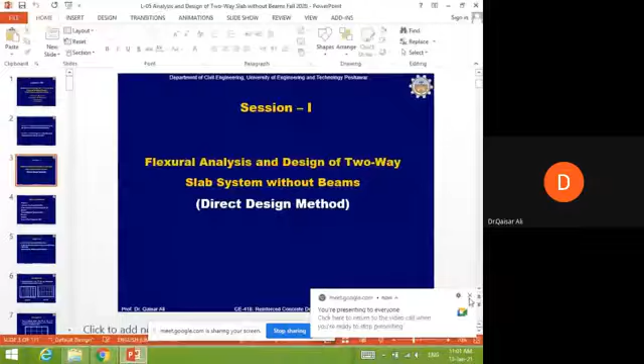Okay, today is our lecture number 5, reinforced concrete design, and we'll be discussing analysis and design of two-way slab systems without beams, which include flat plates and flat slabs.

There are two sessions in this lecture. In session 1, we will discuss flexural analysis and design of two-way slab systems without beams, which is basically based on a method called the direct design method. Session 2 is on the shear design for two-way slab systems without beams.

So in session 1, we will discuss the flexural analysis and design of a two-way slab system without beams.

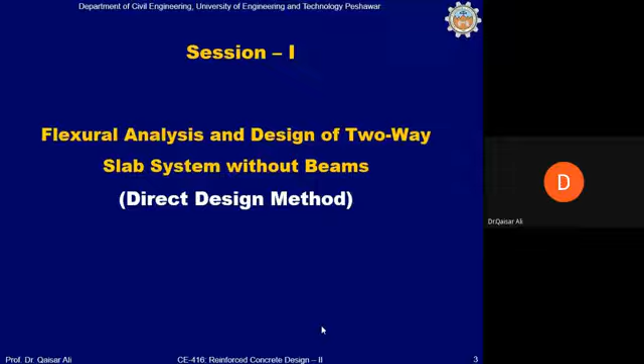The topics to be addressed under this session include background of the method, introduction to direct design method, frame analysis steps using the direct design method, then example 1, two-way slab requirements of the ACI code, examples 2 and 3, and summary of the direct design method.

The objectives of this lecture are: at the end of this lecture, the student will be able to analyze flat slabs and flat plates for flexure using the direct design method, called DDM for short, and analyze and design flat slabs and flat plates for shear.

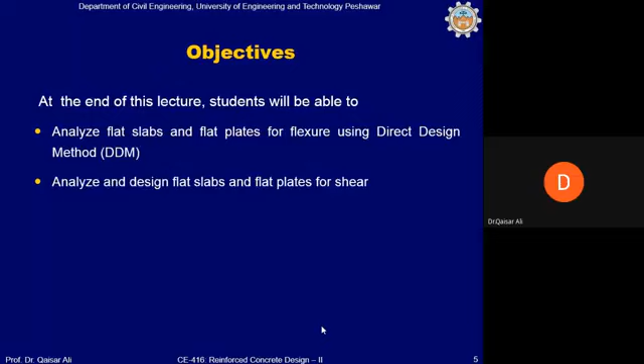This is the background. If you remember, in the previous several lectures before the midterm, we discussed analysis and design of a 90 by 60 feet hall, and we designed this in several ways as a one-way slab system, as shown in options 1 and 2.

We also designed this 90 by 60 feet hall using a two-way slab system by providing columns inside this hall, and this analysis and design was done using the moment coefficient method with the ACI code tables, if you remember.

In this system there were beams, so beams were included, running on the column center lines.

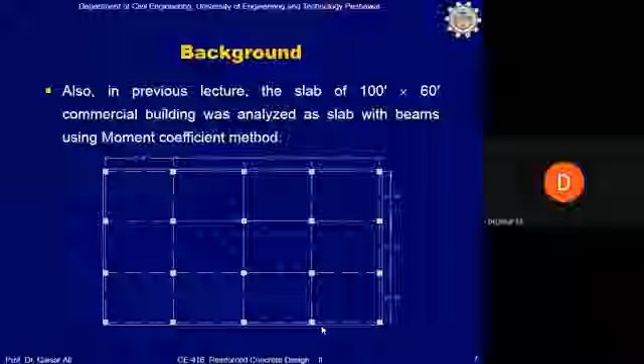If beams are removed from the system, the system can still be analyzed and designed, but then it becomes a slab without beams, which can be provided or not.

So in the same 100 by 60 feet commercial building, if there are shallow or no beams, if the depth is too small, then the moment coefficient method cannot be used.

We have discussed why the moment coefficient method cannot be used, because there is a basic assumption in its application that beams must be stiff enough to resist the deflection of the slab at the points where the beams have been provided.

If beams are not present, or if beams are very shallow, then the beam stiffness will not be such that it succeeds in preventing or resisting the deflection of the slab at those locations. So the moment coefficient method will not be applicable under that condition.

If the moment coefficient method is not applicable—you have seen its application was very simple, and if beams are stiff enough, which is usually the case, then the moment coefficient method can be very conveniently used.

However, if there are no beams in the system, you must have seen slabs without beams, which are not very common in reinforced concrete frame structures, but still quite a good number of systems contain flat slabs and flat plates, depending on the situation.

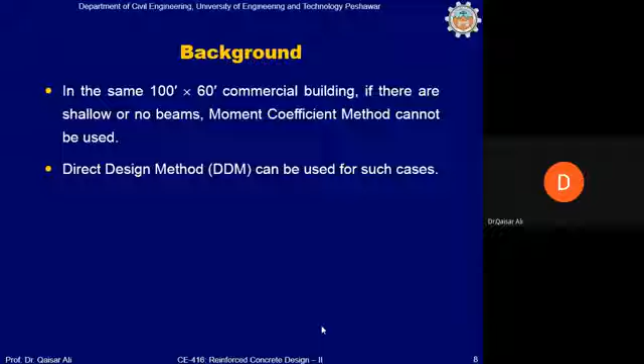So this was about the system. Now, which method shall be used for the analysis and design of slabs without beams?

If you remember, in the previous several lectures you have seen that most of the time we are busy analyzing the system instead of actually designing it. Analysis is one of the most important steps in the overall design process.

If you look at the overall design process, it includes, first of all, an assumption or selection of the sizes of different members, like beams, slabs, and columns. Then the calculation of loads is also very important. Third is the analysis. And fourth is the actual design step, in which we calculate reinforcement, which we call the design step. Though overall, these 4 steps are the steps of design.

So the third step, the step of analysis, is one of the most important steps. You would have seen in the previous several lectures that this is the most crucial step, because it involves analysis, and sometimes it is difficult for us to analyze a system using the exact method of analysis. For this purpose, the ACI code allows us to use approximate methods of analysis, although all these approximate methods are actually an alternate choice instead of the exact method of analysis.

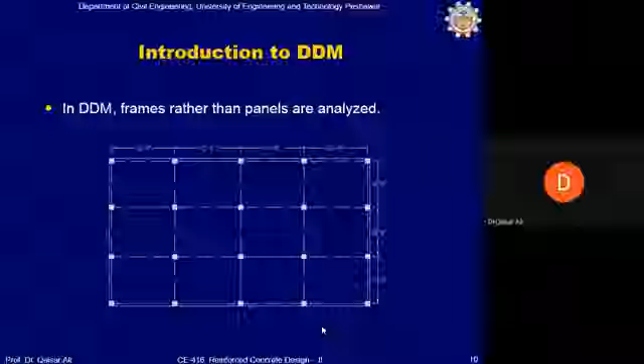Now we will discuss this direct design method by going through its steps. The first difference between DDM and the moment coefficient method is that in the moment coefficient method, panel by panel analysis was done - one panel continuous or not continuous, then we used tables, picked up values, inserted them in the relevant equation, and calculated the bending moments.

In the direct design method, frames are analyzed instead of panels, as you will see in several upcoming animations. For example, if we want to analyze this slab system using direct design method, the center lines are the dotted lines which run on the column center line. They are just center lines, not beams - so the system does not contain any beam.

First, we will divide the system into frames. This frame you can see now on the screen is an interior frame. So the interior frame will be marked, and the frames will be analyzed one by one in both directions in order to get the bending moments in the slabs.

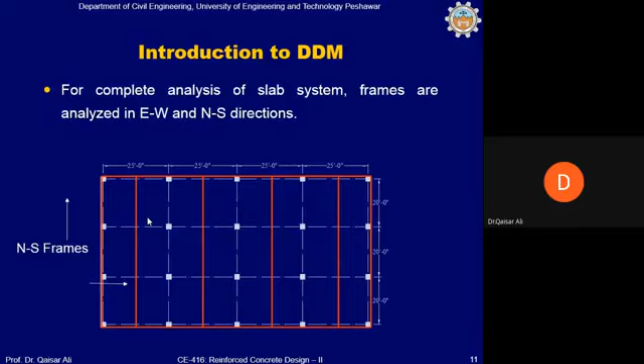Then the frames along the other direction will also be analyzed. After the analysis is completed along both directions, then the design will be done for the relevant bending moments.

Now the limitations of the method. Because direct design method is an approximate method of analysis, every approximate method has its own limitations, and so are the limitations of direct design method. Though DDM is useful for analysis of slabs especially without beams, the method is applicable with some limitations as discussed next.

The first limitation of the method is that the live to dead load ratio shall be less than or equal to 2, which means live load shall not be very high as compared to dead load. Usually dead load is more than live load, so this method is based on the assumption that live load to dead load ratio shall be less than or equal to 2. If it is more than 2, this method will not be applicable.

These limitations have been discussed under section ACI 8.10.2 of the ACI 318. The length of spans shall not vary by more than 33%. This means that if this length is L1, then L2, the length of the adjacent panel, shall be more than or equal to 67% of this at least. If the difference between adjacent spans is more than 33%, then the method will not be applicable.

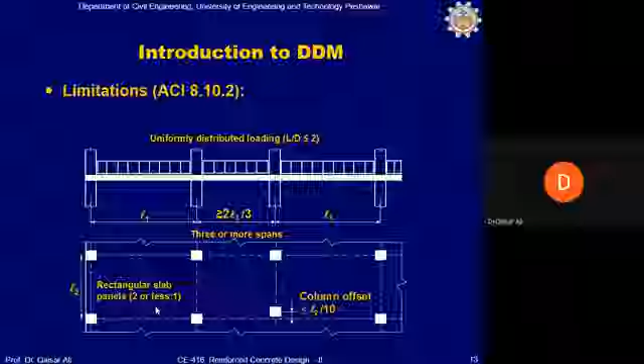The panel must be rectangular or square, and the ratio of long to short side shall not be more than 2. The ratio shall be 2 or less, which will make this behave like a two-way slab, meaning the bending moment along both directions will be there, and both shall be calculated.

The columns must be placed on a common center line. However, if one column offsets from the main center line, the offset shall not be more than 10% of the width of the panel. If this is the width of the panel, then this column, if it is out of the main column center line, shall not be offset by more than 10%.

So these are the limitations. Next, the sizes to be selected in the direct design method are different than the sizes selection which we have used in slabs with beams.

Excuse me, sir. Yes? Please, any question? Sir, should the span be 3 or more in both directions, or just one direction? Both directions.

Which means 3 panels in one direction, 3 panels in the other direction, at least. If there are more, it's okay.

Initially, we can use this table for the selection of slab thickness, because there are no beams in the system, so there will be only thickness of the slab, and the slab must be thick enough. For this reason, the selection of slab thickness is based on this table if the system does not contain any beam. There are basically 2 main columns: this column is without drop panels, and this column is with drop panels.

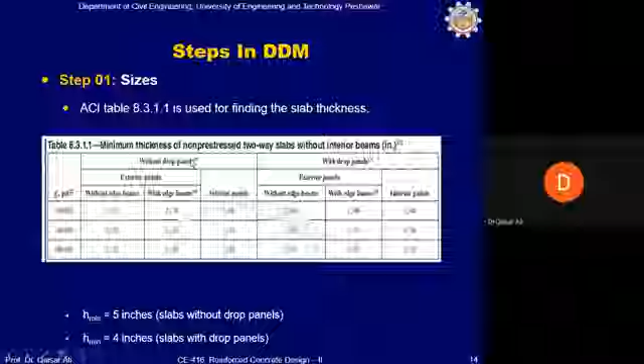You know what a drop panel is, we will discuss this in the next several slides. A drop panel is basically a thick part of the slab in the vicinity of the column, which drops below the main slab. So if it is without drop panels, which means there are no drop panels, it is a flat slab system.

If the panel is exterior or interior, if it is exterior, then whether there are edge beams or not matters—sometimes beams run on the exterior edge of the overall frame, which stiffen the system and reduce drift in high-rise buildings. So if it contains edge beams at the periphery, then this will be the formula for the initial thickness of the slab, or if there are no edge beams, then this will be used. For interior panels, this will be used.

Mostly we use this ln by this first column, regardless of whether there are edge beams or not, because we want to keep our thicknesses slightly on the higher side. Although from an academic point of view, you should always use the correct equation. However, in our design practice, we mostly use this first column for the initial selection of slab thickness.

If you have grade 40 steel, it will be ln by 33. If it is grade 60 steel, it is ln by 30, which means that if the length of the panel is 30 feet, then 30 by 30, you would require a minimum 1 foot, or 12-inch thick slab, and so on—you can use the rest of the table. The minimum thickness, however, for a slab without beams and without drop panel is 5 inches, and slab with drop panel is 4 inches.

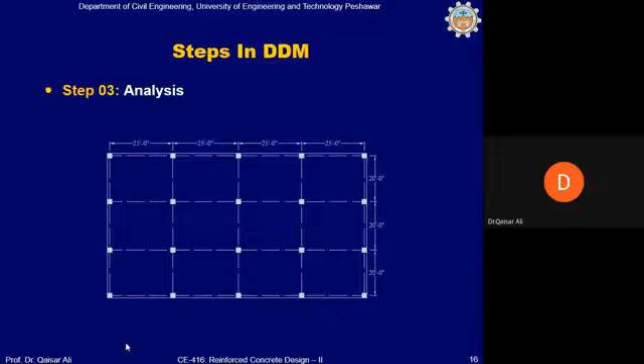The DDM method's first step, step 1A, is marking of the frame and marking of the east-west interior frame. We will do it like this: we will mark the column center line. You can see in the animation the yellow dotted, dashed line.

Then we will draw another line on one side of the column center line, and this line will be drawn or marked on the panel center, so it will be called the panel center line, marked on one side of the column center line. Similarly, another line will also be marked on the other side of the column center line, and this will make the east-west interior frame.

This whole east-west interior frame will be analyzed. This marking of the frames is the first step of this overall analysis method, the DDM method.

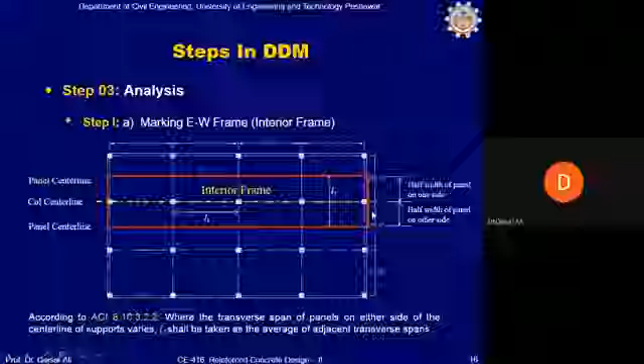However, if there is a difference in the panel sizes, then the average of the two will be taken as L2. For example, if one panel is 20 feet and the other side is 24 feet, from this column center line we mark this line at 10 feet, and from this column center line we mark 12 feet. So 12 feet plus 10 feet gives L2 equal to 22. In other words, add 20 plus 24 and divide by 2, which also gives you 22.

So this means that if slab panels are not the same in size, then the average of the adjacent transverse spans will be taken as L2.

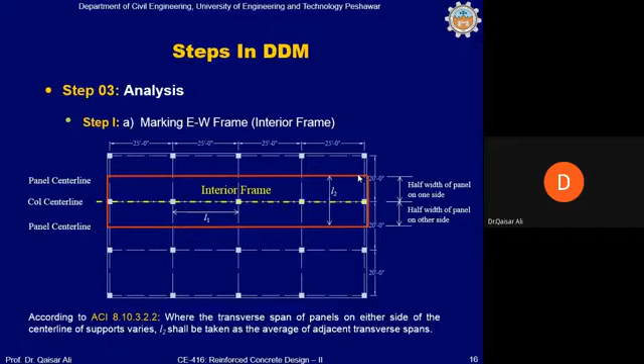Then we will mark the east-west exterior frame. Since in the exterior frame the panel extends only on one side of the column center line, the yellow line, we will consider only one side of this frame. This will be the case of the exterior frame.

However, some small part of the slab also extends to the exterior column edge, which will be shown in the next animation like this. So the total panel is basically the column central line plus half width of the panel, plus the small part of the slab which extends to the column edge.

Okay, any part of the slab which extends beyond this column will not be part of this frame. That will be treated separately as cantilever slab.

So the total width of the frame in this case will be equal to half the panel width on one side of the column central line plus half of the column size, because this is only half of the column. The slab extends only half the column size on the other side.

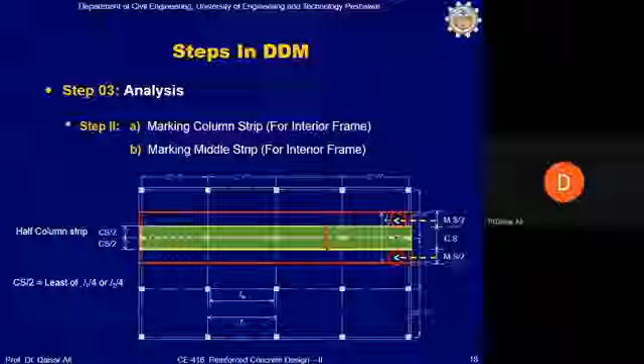Why do we need to divide the frame into column strip and middle strip? The reason is that the column strip would attract more bending moment because it contains columns along this line, so they are much stiffer than the remaining part of the slab. As you will see in the coming slides, once we calculate the overall bending moment, most of the bending moment will be taken by this column strip. So for this reason, column strip and middle strip marking is important.

This is just to calculate the column strip calculations. 5 feet, 5 feet. The total column strip is 10 feet, and 5 feet middle strip, half middle strip on one side and 5 on the other side. This is just a demonstration of the previous step. Nothing new.

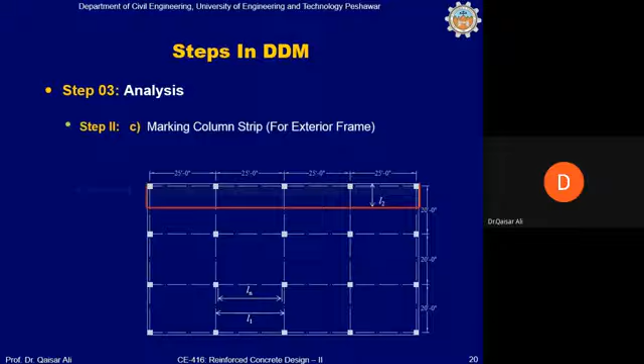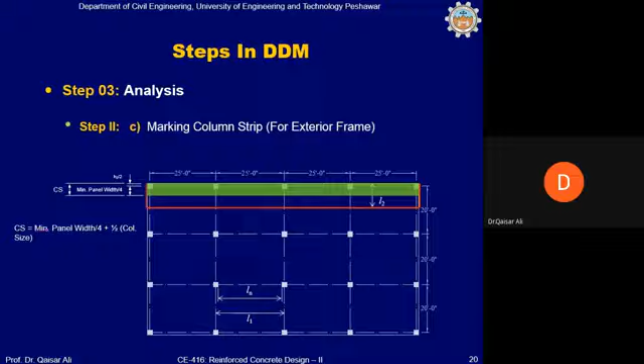Now marking column strip for exterior frame. Column strip for exterior frame is minimum panel width divided by 4, because the column strip only extends on one side of the column center line, so this will be calculated like this. The column strip on the other side will be equal to, from the column center line, half of the column added to this column strip. So column strip on the interior side of the frame will be minimum panel width divided by 4. So 25 feet and 20 feet, out of which 20 is minimum. 20 divided by 4 is 5 feet. Okay, as you will see, like this.

Column strip is 20 divided by 4 plus half of the column size. The column size in this case is 14 by 14 inch, so 14 divided by 2 is used for the column strip in this case.

Total L2 is calculated as half of the panel, 20 divided by 2, which is 10, plus half of the column size on the exterior side of the column center line. So L2 is 10.5 feet: 20 divided by 2 plus half the column size equals 10.5 feet.

Column strip is 20 divided by 4 plus half, which is 5.5 feet, and the remaining is the middle strip. The middle strip will be L2 minus the column strip.

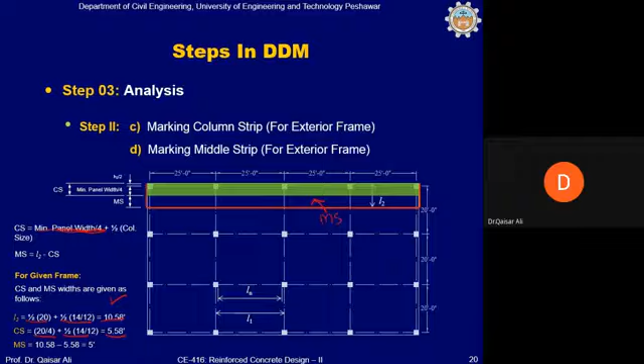Next is to calculate bending moments within the frame. Remember that in every span, the total bending moment, called the statical moment M naught, will always be equal to WU L2 ln squared divided by 8.

For example, if you want to calculate bending moments in this yellow part of the frame, one of the interior spans, then the total bending moment M naught will be equal to WU L2 ln squared divided by 8. This is the total static moment: L2 is the width of the frame, and ln is the clear length of the frame.

WU is the load per square foot of the frame. The bending moments are calculated in a manner similar to the bending moment calculation of a beam. When L2 is multiplied with WU, it calculates the load per running foot, and then ln squared over 8 gives the bending moment across the total width of the span.

For the interior span, once this bending moment is calculated, it is further distributed along the length of the frame into negative and positive bending moments, since we have negative bending moments at the supports and positive bending moments at midspan. The negative bending moment value is 0.65 M naught, and the positive bending moment value is 0.35 M naught.

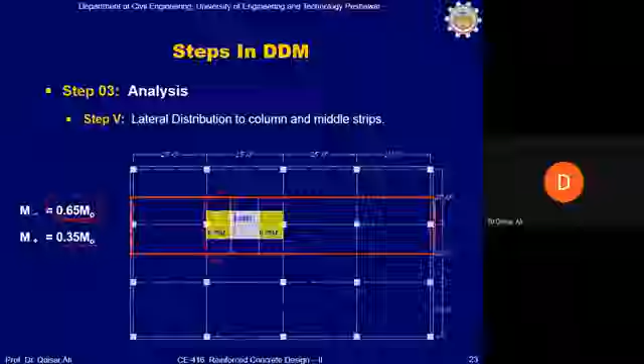Out of this total negative bending moment of 0.65 M naught, 0.75 of it will be taken by the column strip, and the remaining 0.25 will be divided into two parts, half to the middle strip on one side and half to the middle strip on the other side.

For the positive bending moment of 0.35 M naught, 60% of this total will be given to the column strip, and the remaining 40% will be divided between the two middle strips on both sides of the column center line. On the other side, the column bending moment distribution is the same.

Now coming to the exterior span, one of the exterior spans of the frame: the total bending moment remains the same, WU L2 ln squared divided by 8. However, the longitudinal distribution will be different, depending on the end conditions.

If the end conditions are such as shown in this slide, without beams, then the distribution will be such that the exterior negative bending moment will be 0.26 M naught, the interior negative bending moment will be 0.7 M naught instead of 0.65 M naught, and the exterior positive bending moment will be 0.52 M naught instead of 0.35 M naught.

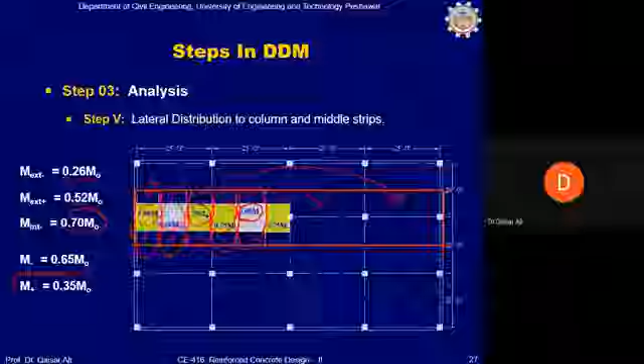So you should write down this slide now, the relevant coefficients. All the relevant coefficients are available on this slide number 27. So you better write down these coefficients in your notes, and then also try to analyze and find out the bending moments using these coefficients for the given system. You know that the given system is 25 by 20 feet. You assume any data, and next I will give you the data, and you can practice yourself and find out the bending moments, and then we can compare with our values. So it will develop your confidence in the method. After you practice this, if you have any question, we will give you some time. So you write down these questions in your notes, and then we will continue. Okay, just 5 minutes.

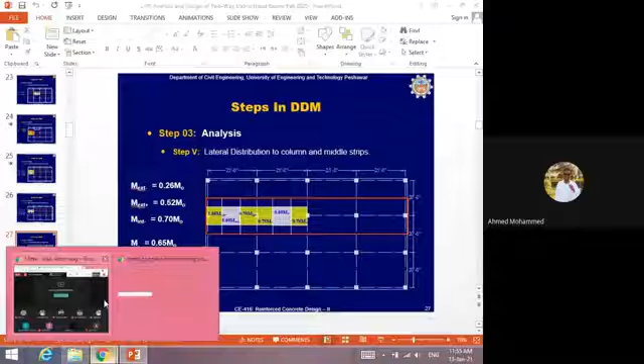Yes, sir. We have actually five moments which are given for static moments, but the strips, the interior and exterior, they are divided into six. Which one panel are you talking about? I'm talking about the interior strips. This is the interior. Yes.

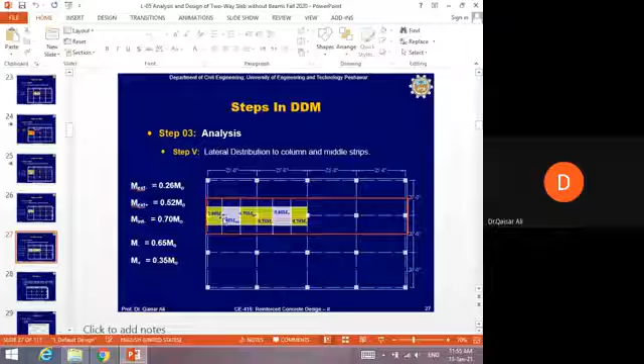So if you count from the beginning, the first moment for exterior has been divided for the mid strip 100%. For exterior, we will divide 100% of the exterior negative bending moment, and this is the exterior negative bending moment 0.26, 26% of m naught of the whole bending moment will go to this exterior portion. Of this exterior negative bending moment, 100% will go to column strip, and 0% will go to middle strip.

This is for negative bending moment, and for positive bending moment, 60% will go to the column strip. 60% of this exterior, 60% of this 0.52 m naught. When you find out m naught, the whole bending moment, then multiply 0.52, 52% of m naught will go to this positive bending moment, and of this exterior positive bending moment, 60% will go to the column strip.

Got it for Ahmed? Yes, I got it for exterior. What about this point, exterior? Yes, I got it for exterior. Okay. What about the interior, sir? Just my question is for the interior. Which moment do you use?

Okay, and what about the next portion of the same strip? On this side, you will take the 75% of this, 65% of m naught. When you find out m naught, then multiply by 0.65 and then multiply by 0.75. Then you will take this column strip bending moment. Okay, I understand now.

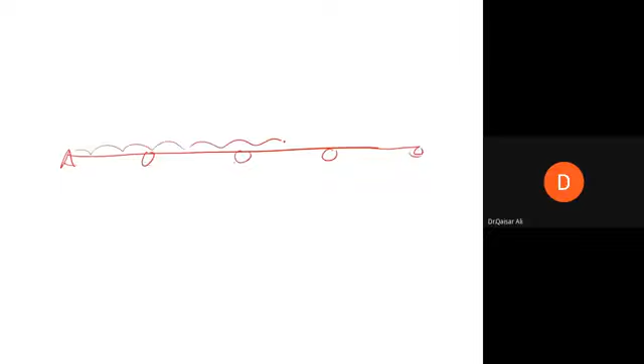ये मैं आपको थोड़ा सा एक्सप्लेन कर दूं, ये इंटरेस्टिंग चीज है। अगर आपके पास कोई कंटिन्यूस बीम हो इस तरह से, और आपके पास इधर मुख्तलिफ सपोर्ट्स हों, तो आप लोगों ने इस किस्म के बहुत सारे एग्जाम्पल किए हुए हैं। इसके ऊपर यूडीएल है, तो इसका बेंडिंग मोमेंट डायग्राम ऐसे बनेगा।

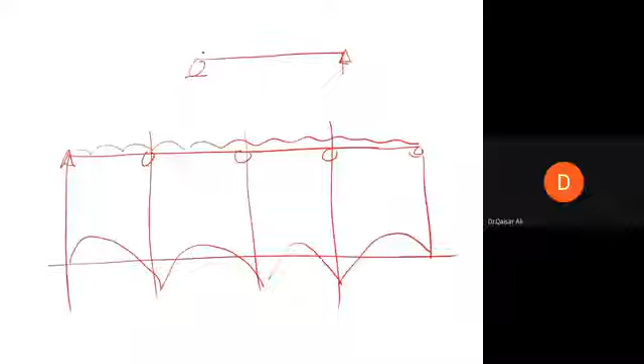मैं बात कर रहा हूँ सिंपली सपोर्टेड बीम्स की, कि उसमें ऐसे सिंपली सपोर्टेड बीम है और इस पर यूडीएल है, तो इस पे आपका बेंडिंग मोमेंट हमेशा WL²/8 के बराबर होगा, क्योंकि इधर 0 बेंडिंग मोमेंट है। अब ये WL²/8 है और ये बेंडिंग मोमेंट चेंज हो गया। तो ये क्यों चेंज हो गया? क्योंकि नेगेटिव बेंडिंग मोमेंट इधर आ गया। तो इस नेगेटिव बेंडिंग मोमेंट ने पॉजिटिव को कम कर दिया। ये टोटल बेंडिंग मोमेंट WL²/8 के बराबर था, लेकिन चूंकि नेगेटिव आ गया तो WL²/8 कम हो गया। अब आप किसी भी इंटीरियर पैनल को ले लें।

इसमें एक इधर नेगेटिव बेंडिंग मोमेंट है, एक इधर नेगेटिव बेंडिंग मोमेंट है और एक पॉजिटिव बेंडिंग मोमेंट है। अगर आप इन दोनों नेगेटिव बेंडिंग मोमेंट को जमा करके 2 पे डिवाइड करें, एवरेज नेगेटिव बेंडिंग मोमेंट, और पॉजिटिव के साथ इसको ऐड करें, तो इसकी वैल्यू भी WL²/8 के बराबर आनी चाहिए, होगी, जरूर होगी। अच्छा, इस केस में क्या होगा?

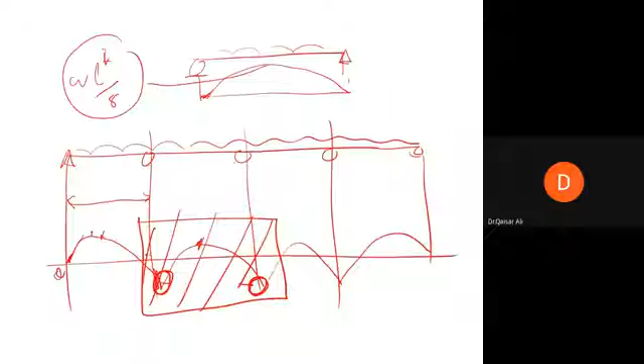इस केस में सिर्फ इधर 0 है और इधर नेगेटिव है, तो ये 0 प्लस नेगेटिव डिवाइड बाई 2। और ये पॉजिटिव बेंडिंग मोमेंट, इसको आप जमा करेंगे तो ये भी WL²/8 होगा। अगर ये बेंडिंग मोमेंट 0 हो जाए तो 0 + 0, यानी कि टोटल पॉजिटिव बेंडिंग मोमेंट WL²/8 के बराबर आना चाहिए। तो मतलब कहने का ये है कि एक स्पेन में टोटल बेंडिंग मोमेंट की वैल्यू हमेशा WL²/8 होगी। जब वो नेगेटिव और पॉजिटिव में डिस्ट्रीब्यूट होती है, तो जाहिर है कि पॉजिटिव बेंडिंग मोमेंट की वैल्यू जो पहले WL²/8 थी वो कम हो जाएगी, और जितनी वो कम होगी उतनी नेगेटिव में चली जाएगी। आई होप दिस इज क्लियर नाउ। कुछ समझ गए आप लोग?

आसिम, किसने क्वेश्चन किया था? यस सर, मैं समझ गया। क्वेश्चन किसने किया था?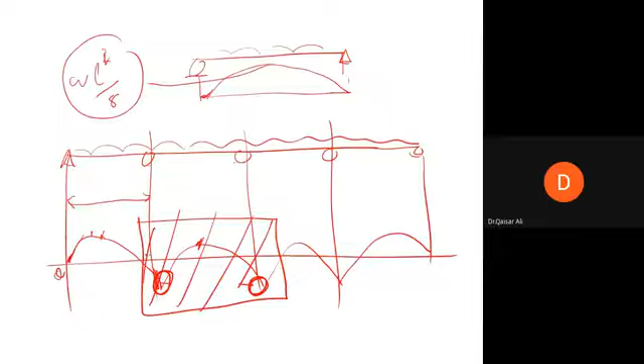ठीक है जी। तो इस केस में एक्सटीरियर में 0.26 और 0.7 जो है, इसको अगर आप जमा करके 2 पे डिवाइड करें, फिर 0.52 के साथ जमा करें, तो फिर भी 100% यानी WL²/8 का आएगा।

अच्छा, नेक्स्ट वी विल अप्लाई दिस इक्वेशंस नाउ। दिस इज द केस ऑफ फ्लैट प्लेट, and you are required to analyze the flat plate shown below using DDM. The slab supports a live load of 144 pound per square foot. All columns are 14 inch square. FC prime is 4 KSI and FY is 60 KSI.

लाइव लोड 144 पाउंड पर स्क्वायर फुट दिया हुआ है, विच इज वेरी अनयूजुअल। आमतौर पे लाइव लोड इतना ज्यादा नहीं होता, 60-70 इतना होता है, लेकिन इस एग्जाम्पल में डिलिबरेटली हमने 144 पाउंड पर स्क्वायर फुट रखा हुआ है। और द रीजन इज दैट द सेम क्वेश्चन हैज आल्सो बीन सॉल्व्ड इन द निल्सन बुक। सो हम उसको वेरीफाई करना चाहते थे कि उनके और हमारे जो आंसर्स हैं वो सेम आते हैं या नहीं। तो बेसिकली दिस इज ए क्वेश्चन फ्रॉम द नेल्सन बुक। तो आप देख लें, इसका 144 पाउंड पर स्क्वायर फुट लाइव लोड है, आप इसके डायमेंशन नोट करें। नेक्स्ट इसके लोड्स तक मैं करूंगा आपके साथ, फिर आप मोमेंट खुद मालूम करेंगे।

ओके, सो यू शुड पे अटेंशन टू दिस नाउ। The first step is the selection of size, and if you remember, I told you that we will mainly select ln/30 as our initial value for our initial equation for the selection of thickness.

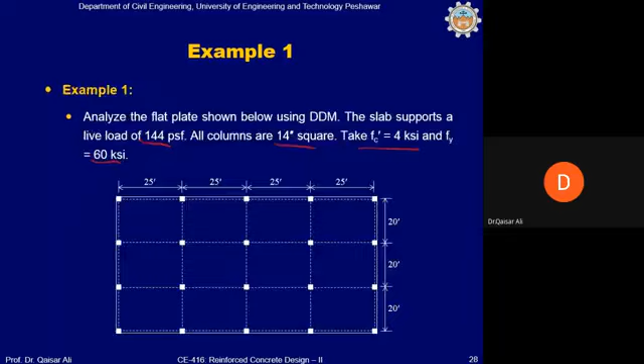For grade 60 steel, ln/30. The slab panel is 25 by 20 feet. If you look at this slab, we are designing this frame. The length is 25 feet and the width is 20 feet, so you will consider 25 feet, not 20 feet, for the selection of size. However, if considering the other direction, you can take L as 20 feet, since regardless of the analysis of the frame in one or both directions, the slab is the same.

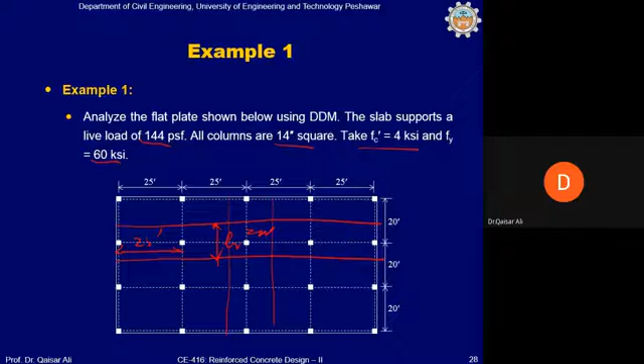Usually you will consider the slab thickness as uniform in all the panels, and it will be calculated based on the maximum length, which is 25 feet in this case. So for 25 feet, we'll calculate the ln.

ln is 25 feet center to center, and the column size is 14 inch. So we will deduct this column size on both sides: 2 into 14 divided by 2, which means one column size. This 2 will be cancelled, so half of the column on one side and half on the other, which means 14, divided by 12 to convert into feet, and then divided by 30, which is ln by 30.

This gives us an initial estimate of 9.53 inch thickness according to the ACI requirement. Let's say we decide to round up this value to 10 inch, so the initial thickness we take is 10 inch.

In the 10 inch thickness, we will also now select effective D. Effective D will be selected based on this figure. The total thickness is 10 inch. The cover is 3/4 inch in slabs, so 0.75 inch. Let's say the reinforcement in one direction is also 3/4, and in the other also 3/4, so one complete bar will be added to give us this effective D, the average D for both directions.

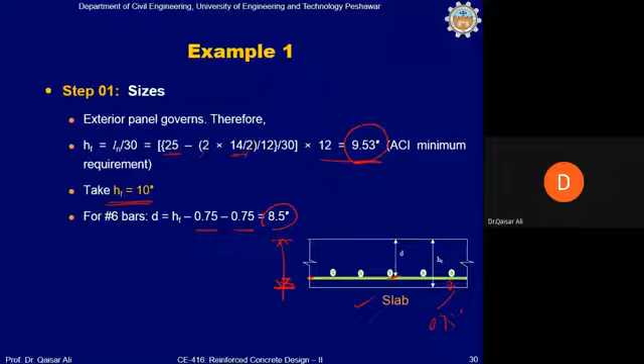If this is the total thickness of the slab, then 0.75 inch is deducted for cover, and 0.75 inch, one complete diameter of the bar, is deducted from this. So 10 minus 1.5 gives you 8.5 inch effective depth for both directions, assuming that we will be using a number 6 bar in the slab.

Service dead load: there is no superimposed dead load given in the example. The service dead load consists only of the slab load itself, which is 10 inch. 10 divided by 12, into 0.15, giving 0.125 kips per square foot.

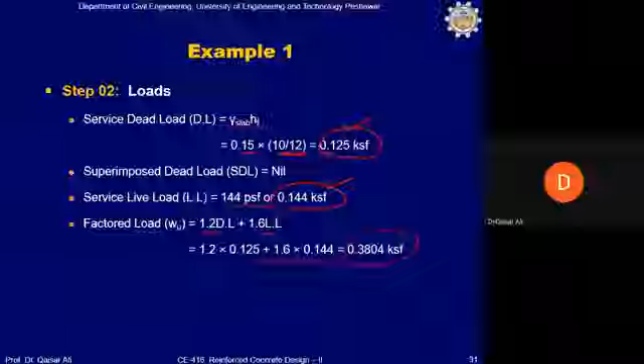Service live load is 144 pounds per square foot, or 0.144 kips per square foot. Factored load, 1.2D plus 1.6L, is 0.3804 kips per square foot, which is the ultimate load for which we should design, analyze and design this slab.

The next steps I would ask you to do yourself. You will compare your values with ours, and I will give you a 10 minute break. In this break, to calculate the bending, follow the steps we've seen in the previous slides: mark the column, mark the interior frame, then the column strip and middle strip, then use the relevant coefficients, with WU being 0.3804 kips per square foot. Use the statical moment, then the distribution of the values. I hope you can do this easily in 10 minutes, and then we will discuss and go ahead further.

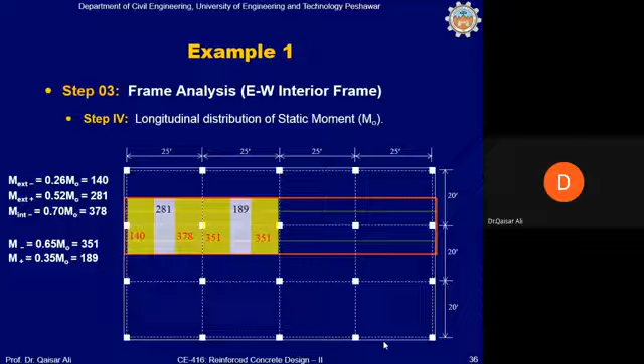Okay sir. So we will now move ahead, okay?

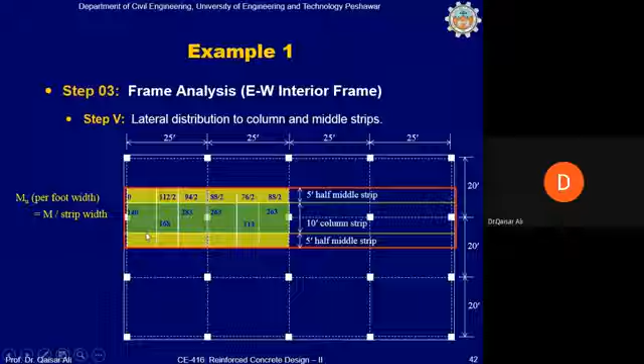The last step in this analysis is that we will divide the bending moments, all the bending moments that you calculated in the total strip, by the strip width. For example, this 140 bending moment is the absolute bending moment in the total strip. So we will divide this 140 bending moment by 10, which is the strip width of the column strip, and then this will give us 14 foot per foot bending moment, because we need per foot bending moment in slabs in order to calculate the spacing of reinforcement.

Once these bending moments are obtained per unit width, then the next step will be design, and the design can be done in the usual manner. Before we enter the design phase, we will try to complete analysis for the exterior frame in the east-west direction, and then we will also analyze the east-west interior, north-south interior and exterior frames. Once the analysis for all the frames is completed, then we will design for the bending moments along both directions.

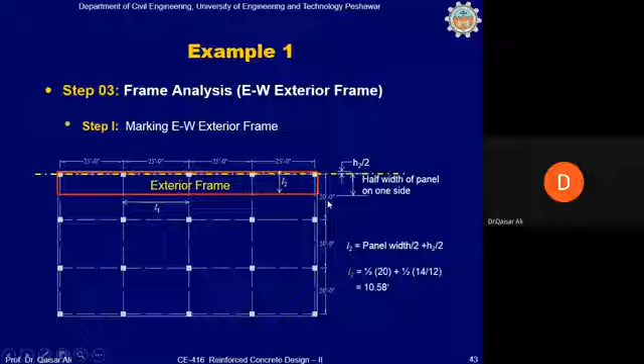Now for the east-west exterior frame, we will go through this quickly. The east-west exterior frame is calculated. The width of the frame is calculated in this manner: half width of the panel on one side, plus half column width, which will be equal to 10, because 20 feet is the panel width, 20 divided by 2 is 10, plus half the column size, which is 14 inch, so half of this will be 7 inch. 7 divided by 12 is 0.58. This will be 10.58 feet, L2.

Now we'll follow the same steps for calculation of the bending moments. Column strip is calculated. Column strip on one side is panel divided by 4. Panel divided by 4 is 20, 20 divided by 4 is 5 feet, and half the column is 0.58, so column strip is 5.58. Whole total column strip is 5.58, shown by green color. The remaining part is middle strip, which is 10.58 minus 5.58 feet, this will be 5 feet.

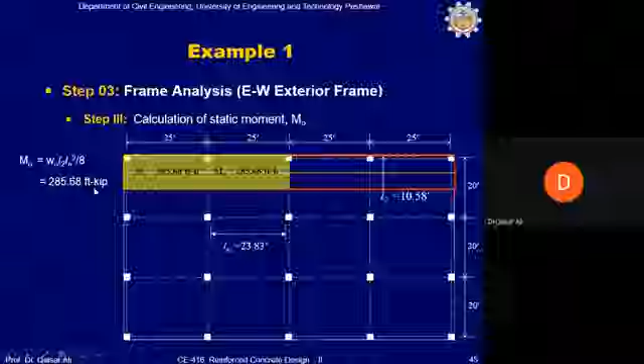Once these are calculated, in the next step you can calculate the bending moments following the same procedure used for the interior frame. The total static bending moment will be WU L2 L square. By this time L2 will change, which is almost half of the value used in the interior frame, almost half, not exactly half, which is 10.58. So this will give us a bending moment of 285.68 foot kip, which is almost half of the previous value of the interior frame.

Then the bending moment will be distributed longitudinally as well as laterally. These are the longitudinal distribution coefficients: 0.26 m0, 0.52 m0, 0.7 m0, 0.65, 0.35. Multiply coefficient with m0, and you get values: 74, 148. Next, the lateral distribution to the column strip and middle strip is done according to these coefficients: 1 times m exterior naught, meaning this total 74 will go to the column strip, 148 multiplied by 0.6 will go to the column strip, and the remaining will go to the middle strip, and so on.

So finally, these are the bending moment values: 24, 89, 59, 150, 50, 140, 46. Further, these bending moments will be divided by the relevant strip width. The column strip width will be used for the column strip bending moments, and the middle strip width for the middle strip bending moments: 74 divided by 5.58 and 59 divided by 5. This gives us per unit width bending moments like this: 13.26, 15.94, 11.87, and so on. These are the final bending moments, and this is a summary on slide number 50 for the east-west exterior frame.

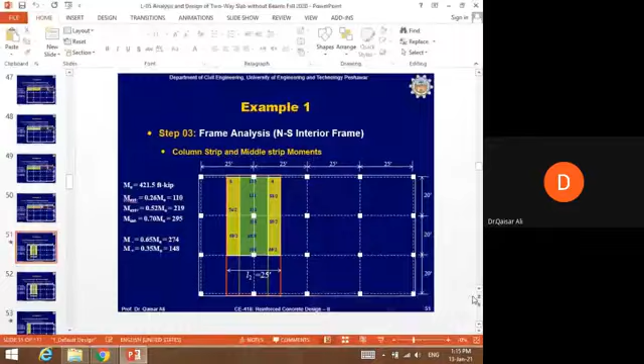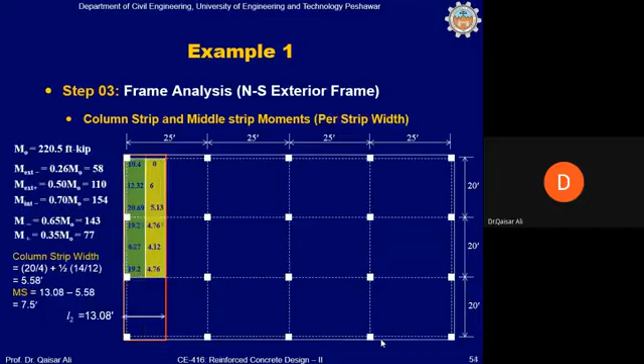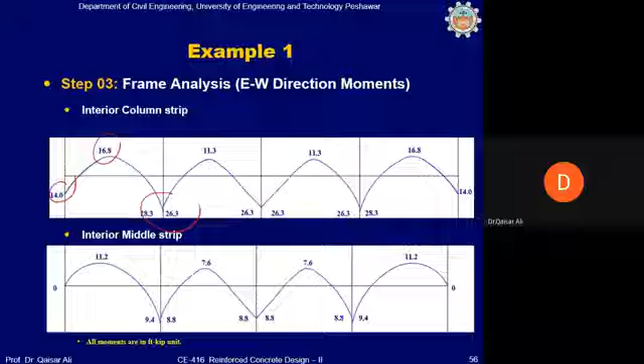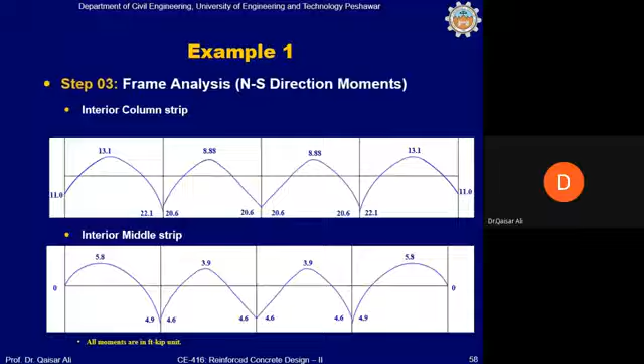These are the values along the north-south direction. Along the north-south direction, the values will be written in the same manner. These are interior column strip values for the north-south direction, and interior middle strip values. Okay, and the next is the design.

I strongly recommend that you do this design yourself. You can compare the design that we have finally done for this slab, and compare your design values. You can use some other bar instead of number 5 - we have used number 5 bar in this design example.